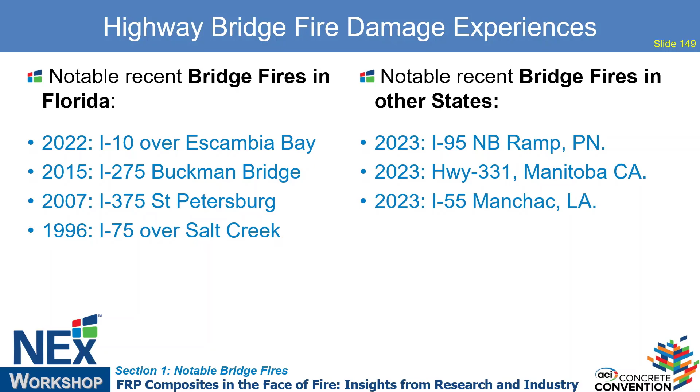So I'll just go over some of the more recent fires that we've had in my home state, and then also even more recently nationally, and then some considerations of what the bridge community might be interested in pursuing, specifically tailored not just to FRP strengthened or reinforced structures.

This is probably the worst fire that Florida DOT has experienced in the last 40 years. So typically all the major damage fires that we experience are from vehicle accidents, typically fuel trucks, tanker trucks, either hitting the traffic railing or hitting the columns underneath, and then that fuel spills and ignites, and then you get potential damage on the deck. If it leaks through the expansion joints, then you'll get all the bearings essentially carbonized because they're mostly neoprene. So typically the span is toast, and you're typically just replacing the entire structure.

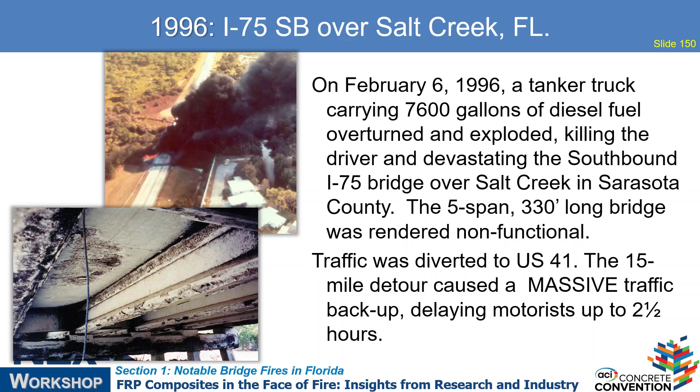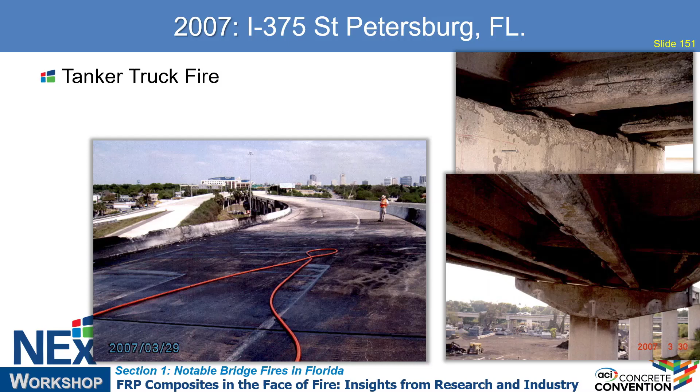These fires are really hot, so being able to resist that to maintain the structure's integrity for putting it back into service is hardly practical. But there are probably things that we can do. So this is St. Petersburg, Florida, and again, deck fire, concrete traffic railing impact. That's why there's a notch out of the railing there. But again, a lot of damage underneath because of the fuel spilling down underneath the bridge.

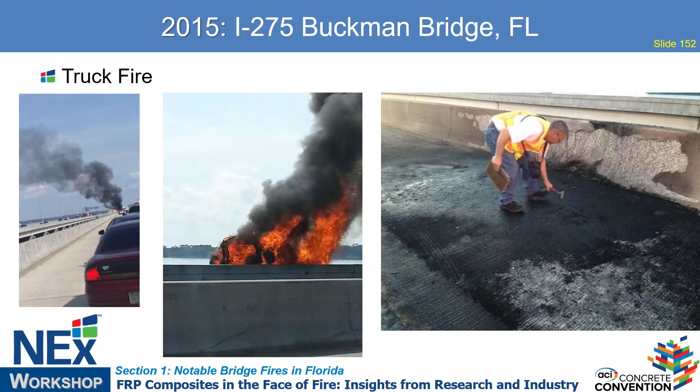So this was a few more years back than that. Again, it's not that we don't pay a lot of attention to them, but we don't specifically address them in the code, and we just seem to be comfortable with just repairing after the fact. And there's probably a reason for that, I'll get to it.

So this is a new challenge that we've actually experienced a couple of times with homeless encampments under the bridges. In this case, this was last year, and they just finished the rehabilitation on this bridge. Actually, this was the bridge that was pushed off its foundations during Hurricane Ivan back in 2004. So this is the brand new, well, it's not brand new anymore, it's 20 years old, replacement bridge.

Anyway, the end span was a nice place for the homeless to hang out, and they had accumulated quite a lot of combustible belongings, couches, trash cans full of whatnot, and there was a bit of an argument between a couple of the residents there. This guy up here, nobody likes you, David. David set fire to one of the other residents' belongings and essentially created quite a challenge for our district maintenance guys. So again, those are post-tensioned beams, damaged because of the heat and fire.

They had to go back in and restore capacity using FRP, externally bonded strengthening. Now, to prevent that happening again in future, they encased the entire abutment, so now you cannot access underneath the bridge. Well, anybody can break a lock and key, but it's a deterrent, let's just say, not a guaranteed solution.

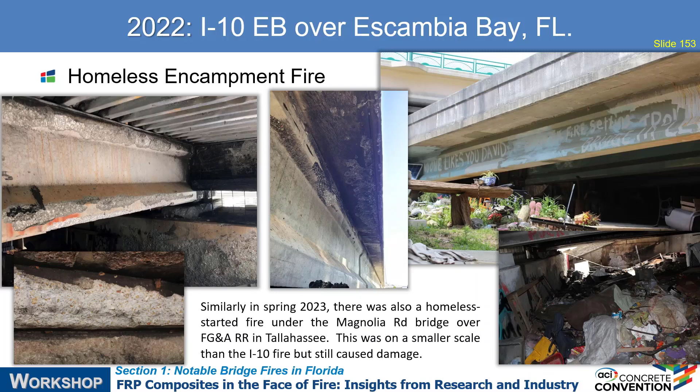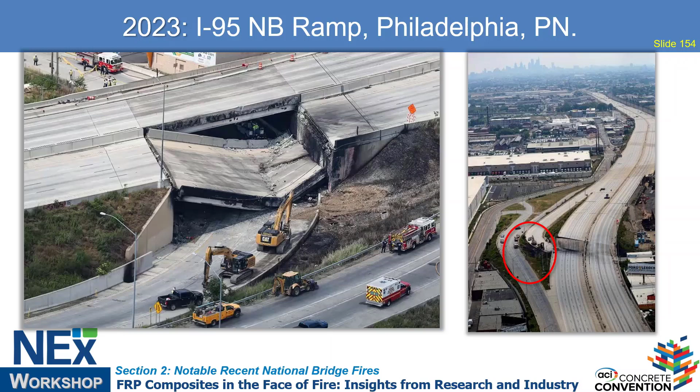We're probably aware of the I-95 collapse. Again, that was a tanker truck coming off the interstate. Not much you can necessarily do in that situation. The adjacent span also had to be demolished because it was severely affected.

What's interesting in this fire is the pattern of the reinforcing that was essentially left on the exposed spalled concrete. So that necessarily wouldn't be the effect as much if you had FRP reinforcing, but the residual integrity of the wall obviously is compromised.

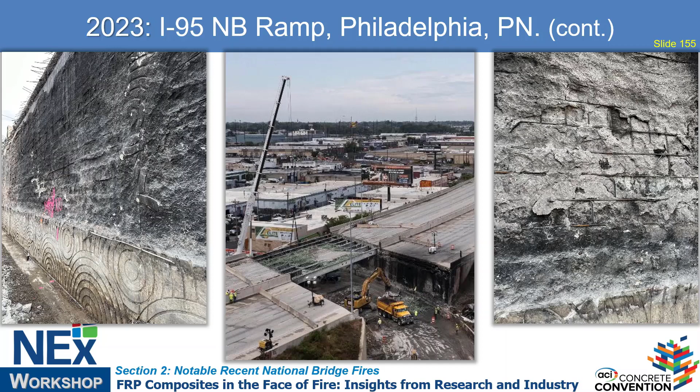So I think these were cast in place in abutments. We have quite a lot of mechanically stabilized walls that could potentially be impacted as well.

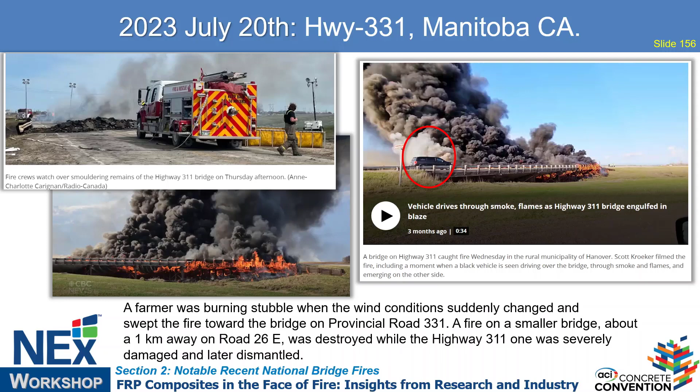So this was an interesting one recently in Canada. A farmer was burning off some crops after harvesting, and it ended up escaping to a couple of nearby bridges. But why it made the news was because this crazy driver ended up driving through the smoke across the bridge while it was on fire. So I guess they had a pretty important appointment to get to.

So this was last week. This was because of fog. There was a pile-up on I-55 in Louisiana. Pretty horrible situation there. Again, there's a deck fire. There isn't as much fuel in this case, so really just the potential for surface spalling, I think, in this case.

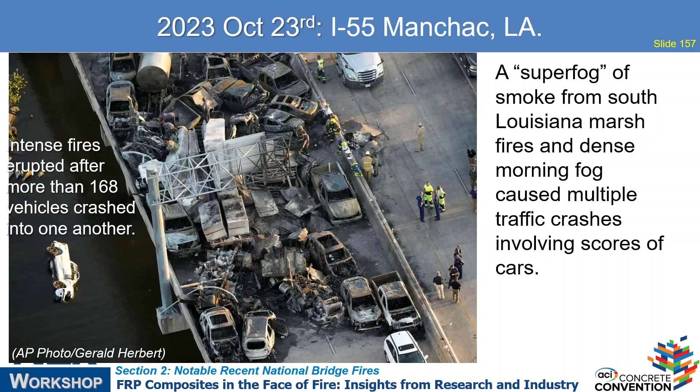But I didn't get a lot of details since it was so recent, but yeah, there was some freight involved there as well. So we'll see when the engineering reports come out what they had to do there.

So just speaking generally, I actually should have split this up into 3 types of FRP reinforcing. Internal reinforcing, GFRP bars, carbon prestress, those are typical things that we might want to consider in the future. Externally bonded, there's been a lot of talk about residual strength.

I think it's important to realize that, probably unlike buildings, for bridges, and this isn't just a Florida DOT modification, we don't strengthen bridges unless they can take 110% of the dead load and a proportion of the live load, depending on how many girders you have. So that doesn't account for the reduction in strength of the steel inside the existing beam. But that's, I think, the third priority of what we might want to address.

And the third one, which I didn't really put up in here, but it's similar to external, is FRP members. So we've got a few proprietary systems out there now that are proposed for vehicle bridges, and there's quite a few pedestrian bridges using truss systems and others. So they're a little more susceptible, I guess, to failure in a fire.

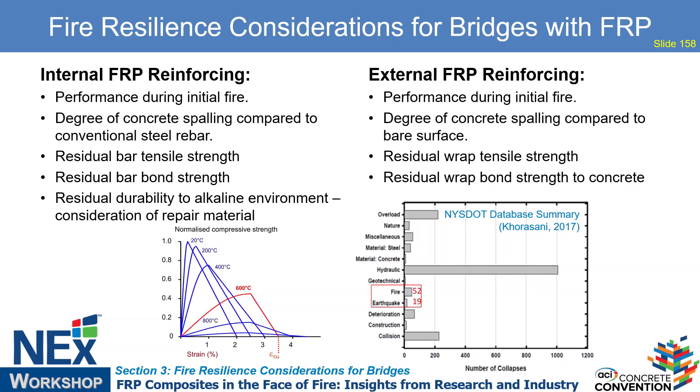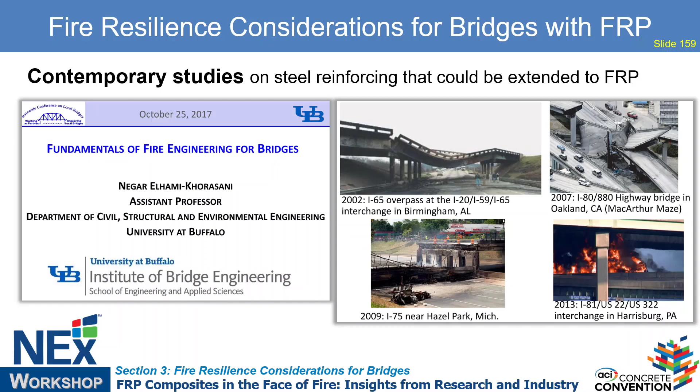So this is a presentation from 6 years ago from Dr. Khorasani, again highlighting some other bridge fires in less recent history, since this was 2017. She compiled a list of all the different temperature curves that might be considered for the zone, based on European standards. So she has some things that could be incorporated into any design provisions for bridges.

So right now there are provisions in the National Fire Protection Association 502, not mandatory, but requirements for bridges and tunnels. And typically these are what we use for tunnels. To my knowledge, we only have 2 tunnels in Florida, and might have a third one in 10 years.

So I guess we're really starting from scratch. We don't have the time, we don't have the temperature. It's not just an issue for FRP, it's an issue for steel as well. So there's plenty of room. I don't think there's a huge urgency in the AASHTO community to address it. But as we start considering multi-hazard events, then maybe they will.